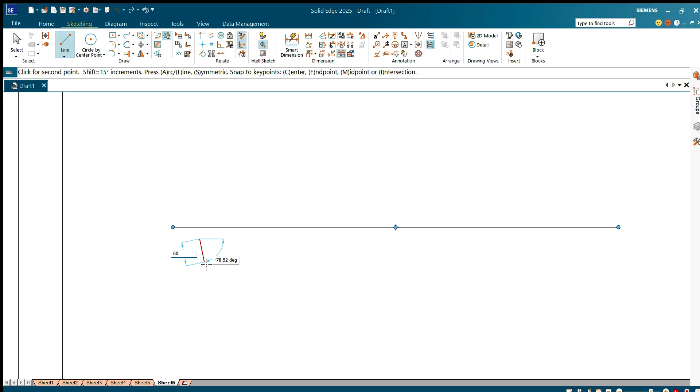So this was the previous problem, and I will move on to the next problem. So many problems have been done for triangle lamina itself. We'll start. The size should be 0.15 for the XY line. Okay, enter. Just draw a random line. Done. So I'll draw the projections first, 0.05. Hit enter. So set square, right? He told the longest side is 60 mm. So will it come? Okay, so I have to zoom out a little.

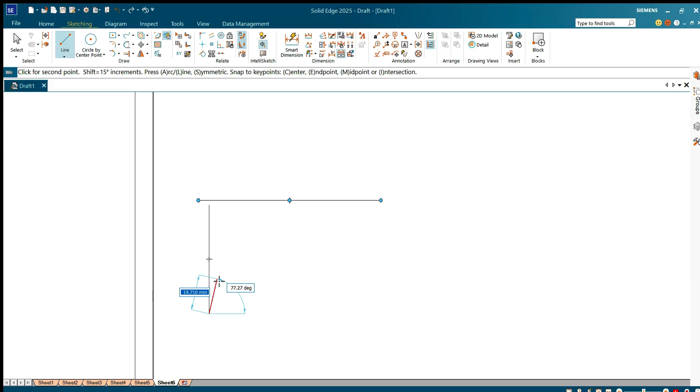Okay, fine. And then see one angle he told. I'll just take any length. I'll suppose it is 40 itself. Hit enter. So okay, but I have to put the degree. So one was 30, one was 60. So let me just take this as 30 degree. So type 30 and hit enter. Then I'll select this again. So 60 degree. See, minus 60 degree automatically it has taken.

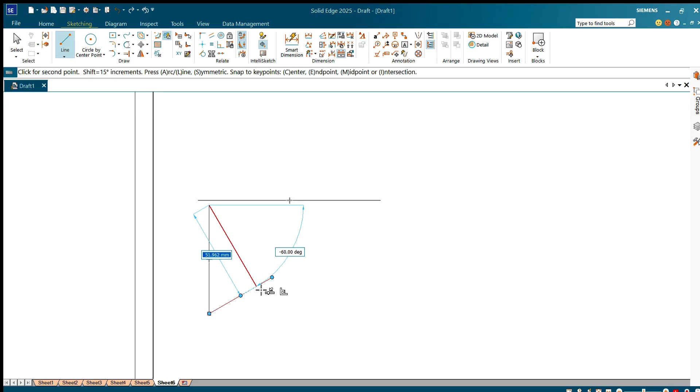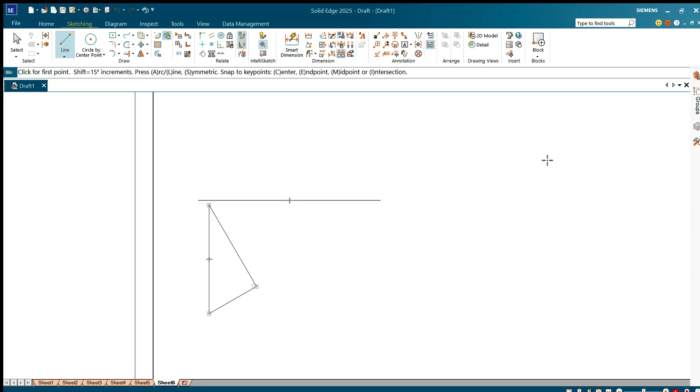Okay, then trim, done. So see now I hit escape. So this thing 30 degree, 60 degree, but 51 point this mm, this is 60. Okay, done. So I just delete this thing. I'll put a new line. Okay, no, I have to extend it, right? I'll put a line here, extend to next. I'll do it like this. Escape, delete, little zoom in.

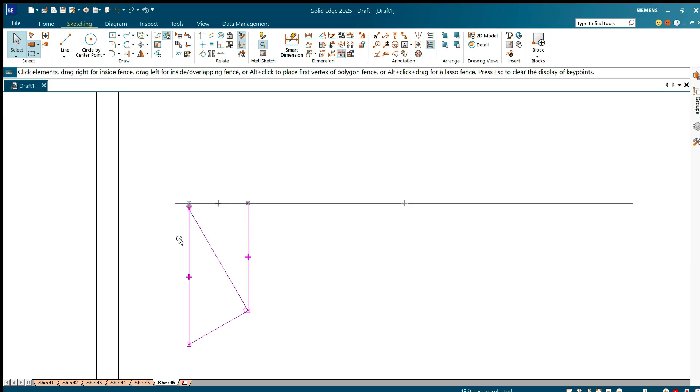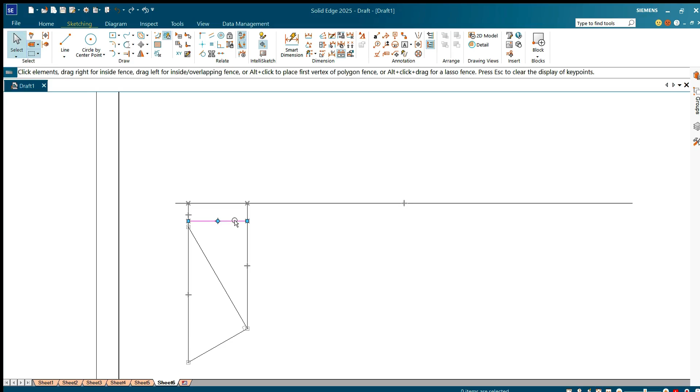Fine, more than enough. Now I have to draw projections. Okay, then I have to draw this here. Fine. Since this thing is looking kind of... I'll just move this complete part. Okay, it's not happening, so I'll use the move tool itself. Whole thing was not selected. Select anywhere, just bring it a little down. Okay, so extend to next. Escape, delete this line, and draw a new line from here to here.

Now what I have to do, move option, copy this tool, select this place, I'll put it here. Oh Lord, I said how fast we'll do it. Fine, we'll start doing it fast. I have to rotate this to what degree? 45. Hit enter. Left click.

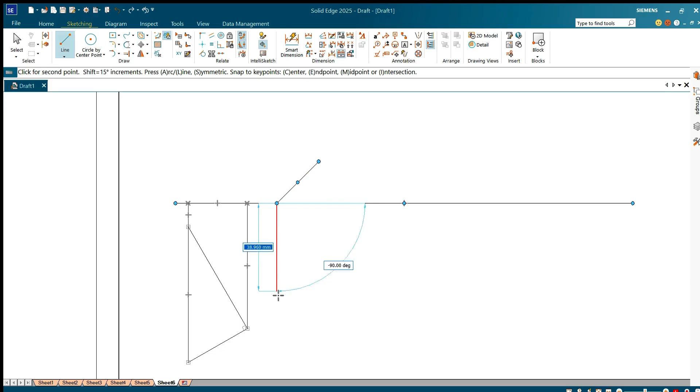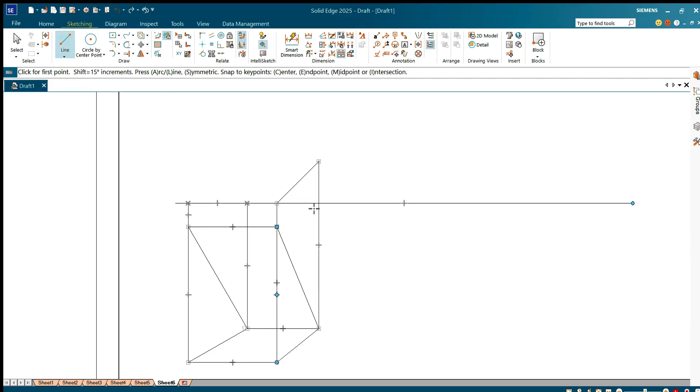Go to line projections. This will come till here. Okay, and this will come till here. Okay, and this will go till here, here, from here to here, here, here, and I'll put one more line like this. Okay, done. Then what it says, it makes an angle of somewhat 45, right? So I think that was 30 degree, right? Just a second, let me check it.

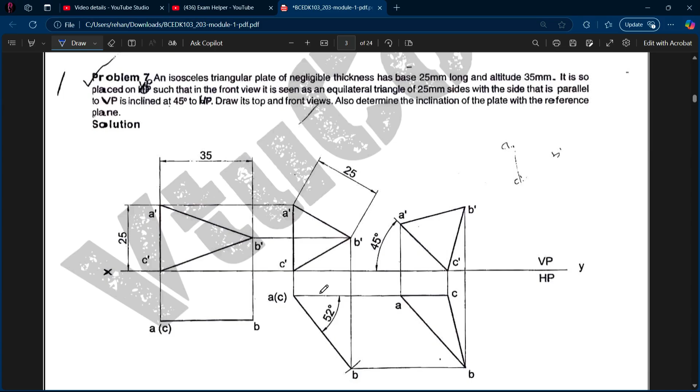Problem 6. So problem 6 is just a set square, and after that problem we have an isosceles triangle plate of negligible thickness. So see, these are all not so different but the same thing itself. Okay, finally we'll just focus on this problem. So 30 degree 60 degree set square of 60 mm longest side. See, the longest side is so kept such that the longest side is in HP, making an angle of 30 degree with VP.

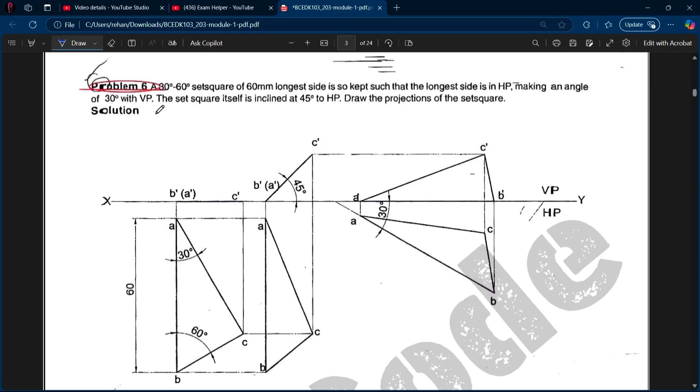Okay, so the simple thing to understand is that since they have told the longest side is in HP, which means that it's resting on the longest side. Okay, makes angle of 30 degree with VP. Okay, and the set square itself is inclined at 45 degree to HP. Draw the projection of this set square. It's very simple. Okay, I will complete it very fast and see. Let's see how fast we complete.